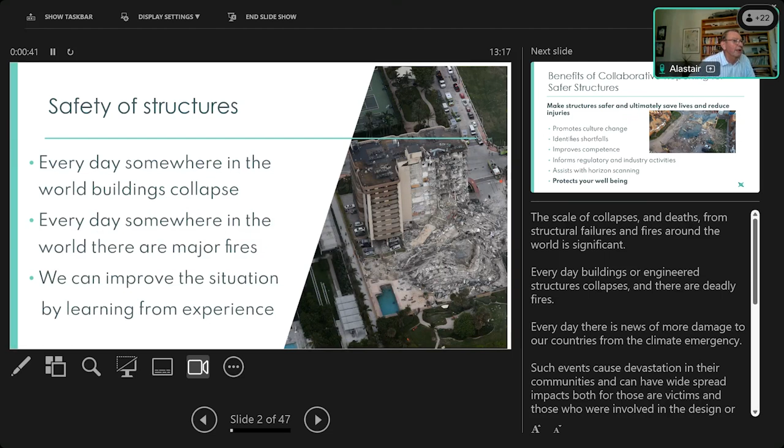CROSS stands for Collaborative Reporting for Safer Structures. It's been ongoing for a number of years, and I will go through a bit of the history, some examples. But whilst most buildings are designed and constructed and occupied perfectly safely, every day somewhere in the world there are collapses, and every day there are major fires. But we can improve the situation by learning from experience, and that's what our job is to do. Pick up information from various sources and share that with advice on how we can improve the culture, which is a very long-term thing, make structures safer and ultimately save lives. That's our big objective. But also we can identify shortfalls, such as the ones you will see from GIRI.

We can help improve competence as well. We work with regulators, and we try and do something which is called horizon scanning, which is to see what is the next big thing which might be coming along and affect our industry. But above all, we are there to protect your well-being. So anybody who's been involved with a major event will know how debilitating it can be. Indeed, can be shattering and can destroy lives and careers. If you can avoid being involved with any such event or catastrophe, then your well-being will be much improved.

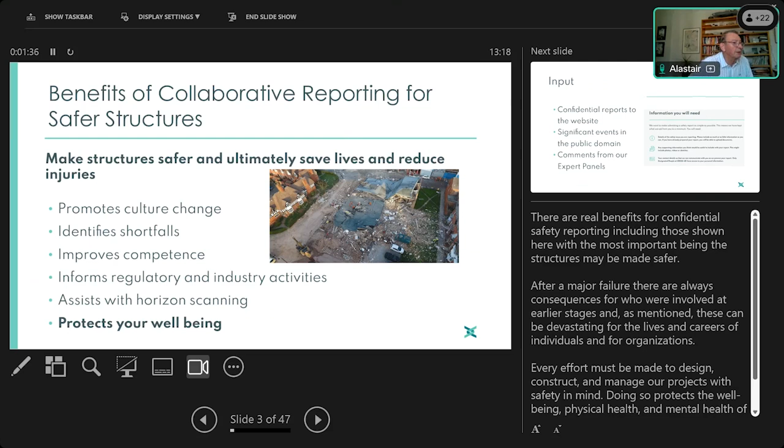So what do we have as an input to our systems? We get confidential reports, and the confidentiality is a very important aspect of what we do, because we never publish the names of reporters or details.

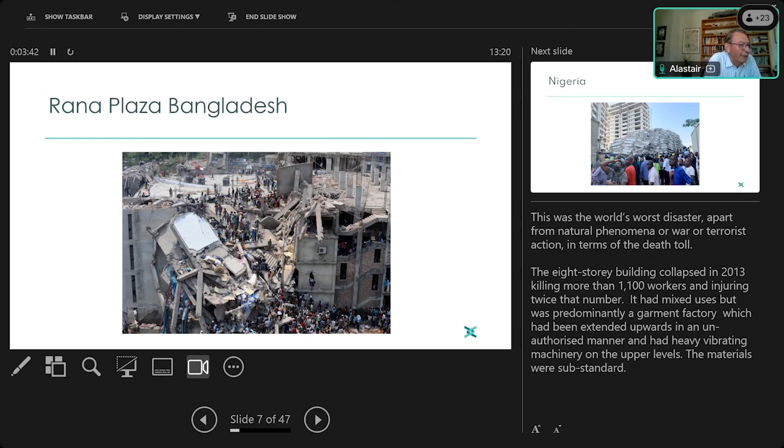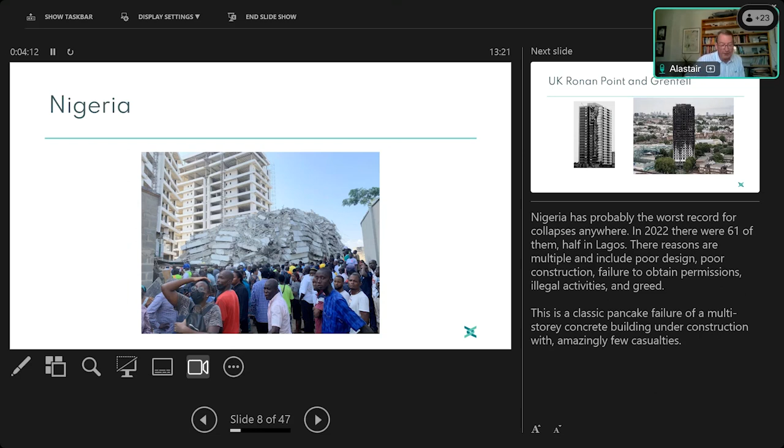Here is one in Nigeria. The pile you see in the foreground is debris from a multi-story building in what was a pancake collapse - a classic collapse where one floor comes down on top of another. The most extreme example of that was the World Trade Center collapses, but this is one in Nigeria where there are many, many collapses - Lagos is particularly bad. We don't necessarily get to know the details, but structures can be very dangerous in Nigeria.

And we've had our own share in the UK. On the left-hand side is Ronan Point, a multi-story building with a corner that collapsed as a result of a gas explosion - a relatively small gas explosion near the top - which led to all sorts of changes in building regulations and the design for increased robustness in buildings. And on the right, of course, is the sad sight of the Grenfell Tower. We'll talk more about that later, but events relating to catastrophic situations in buildings can occur in London as well as anywhere else.

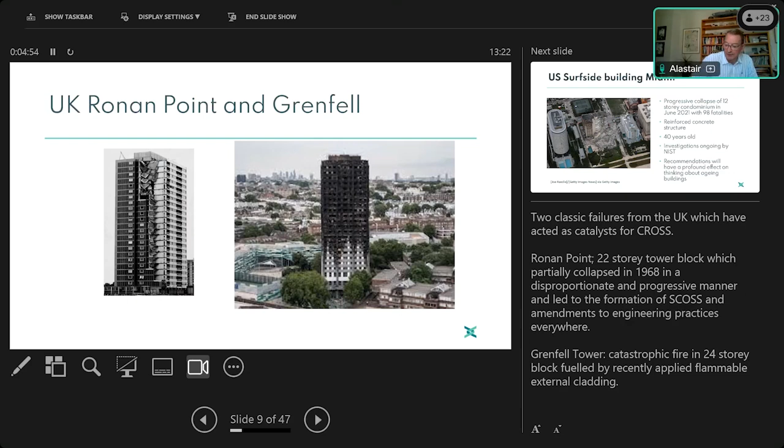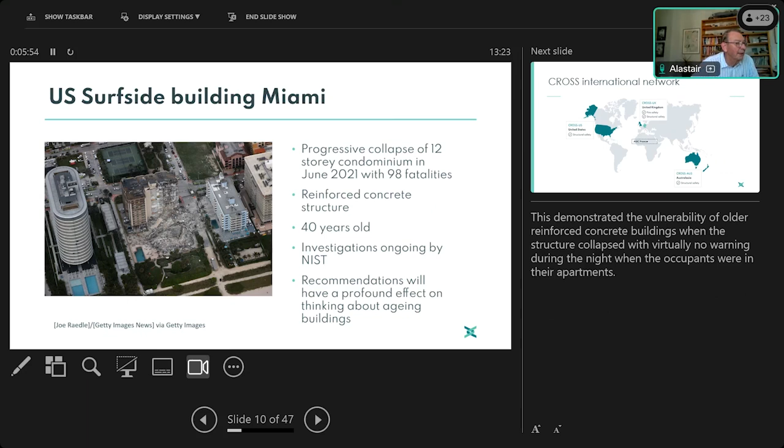And here is an example from America. You can see a pile of debris in the middle of the picture on the left, and that is the south side of a condominium block. The north side remains in place. It was 40 years old, reinforced concrete, and it collapsed with virtually no warning. It collapsed at night, so the apartments were occupied, and there were 98 fatalities. There's an investigation going on at the moment by an organisation called the National Institute of Standards and Technology, a very high level federal agency in the States. When its results come out, probably early next year, the recommendations will have profound effects on the way we all think about 40-year-old concrete buildings - how safe are they, and how do they need to be observed to make sure we don't get similar events here as well as in the States.

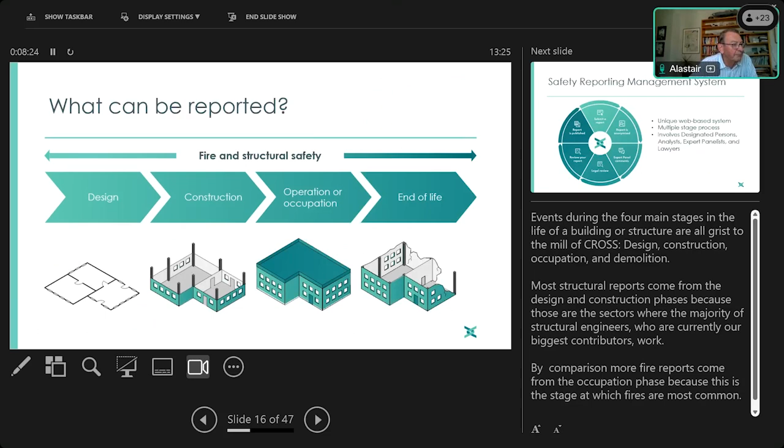And we have a very sophisticated safety reporting management system. We've got 25 steps which go from the time when somebody submits a report to the time when it gets published. These are steps involving anonymization, comments from our expert panel, legal reviews, and other matters to make sure that everything we publish is safe from the point of view of the reporter, and safe and secure from the point of view of CROSS.

Our expert panels consist of volunteers from throughout the sectors, from design, construction, academia, nuclear, civil, and the whole gamut of experts who might be expected to operate at the top levels of the construction industry. Some of them have been there for many years, and they're all dedicated to supporting the role of CROSS.

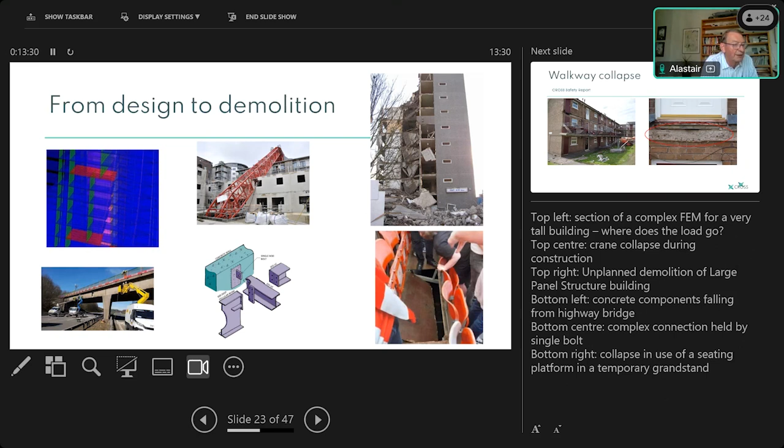That brings to mind the 4 bolts, for example, which was the failure of the Boeing aircraft recently, and the failure at the Manchester Arena from some equipment which fell down, both because of a lack of bolts. Finally, the picture on the right, a bit difficult to make out, shows someone who fell through the floor of a temporary seating stadium, tripping due to defective construction or ineffective maintenance.

So we cover all the gamut, and I'm going to give some examples, rattling through these. On the left is a block of apartments with balcony access walkways at 2 levels. The top one fell onto the bottom one, fortunately without anybody being killed. If you look at the picture on the right, outlined in red, showing the breakage, the rebar is in the bottom of that slab. So that slab had existed for years without any reinforcing in the top, where, being a cantilever, it should have been.

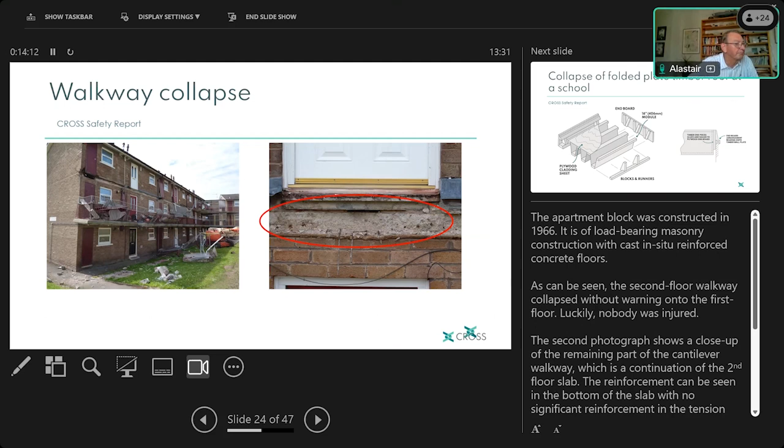We get quite a lot of reports about problems with schools. This is a rather complex roof which collapsed one night. Again, we get a lot of collapses at night, possibly due to temperature changes, but also it's luck when buildings are not occupied. This is a complex roof over an assembly hall made of bits of plywood cladding, some softwood battens, some very small nails and some glue.

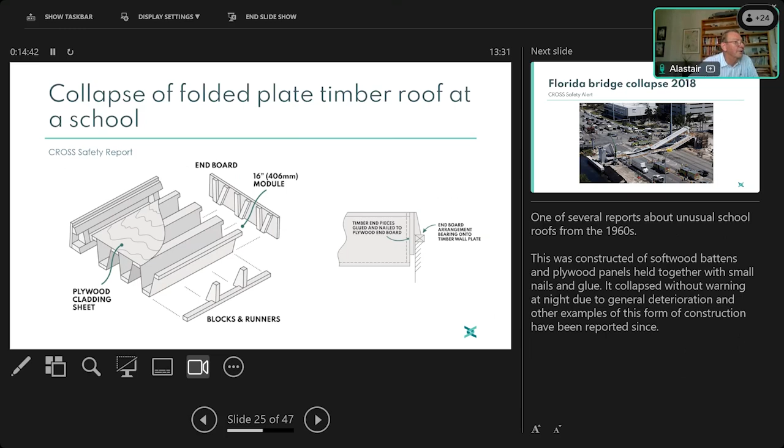It lasted about 40 years before coming down, and we've had several others since. And one from America, about which we wrote an alert. This is a bridge which was partially built, resting above a running 6-lane highway, when it came down suddenly, with unfortunately vehicles underneath it. Just a little bit of detail about this one.

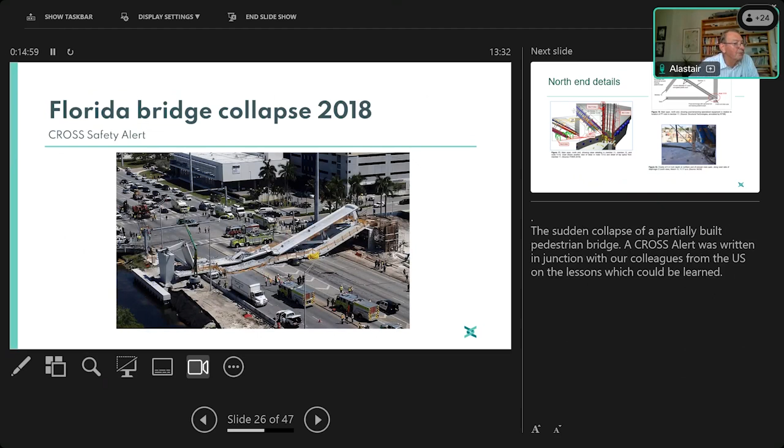You will see on the bottom left-hand corner a complex joint with vertical and horizontal members of a concrete truss. There are rebars coming in from several directions, and pre-stressing cables coming in. To complicate things, there is a drain pipe running through the middle of that connection. It's shown on the top right where there is a diagonal, and at the bottom right-hand corner.

After this had been put in place on temporary supports, large cracks developed - you could put your fingers through them. Over a period of 3 weeks, those cracks developed. They were seen by multiple professional people, including the engineers who designed it, the engineers who supervised it, and federal authorities, and they all did nothing. Then it was decided that in order to close the cracks, the pre-stressing in the diagonal would be increased, and as they did that pre-stressing, the whole thing fell apart. So, problems with design and construction, most importantly problems with people not paying attention to obvious defects and not having the moral courage to do something about it.

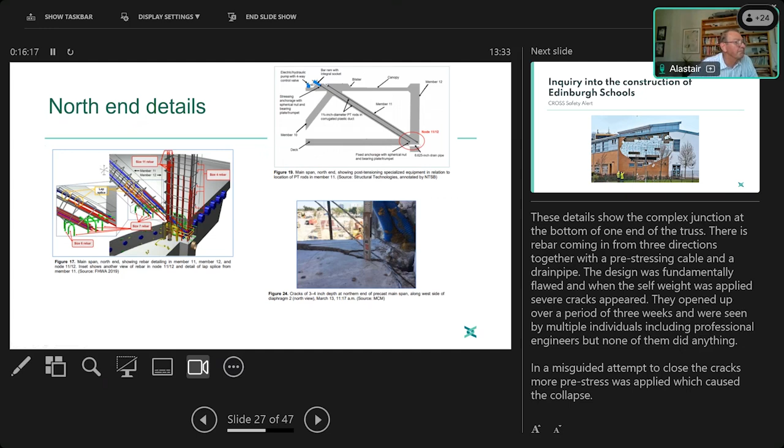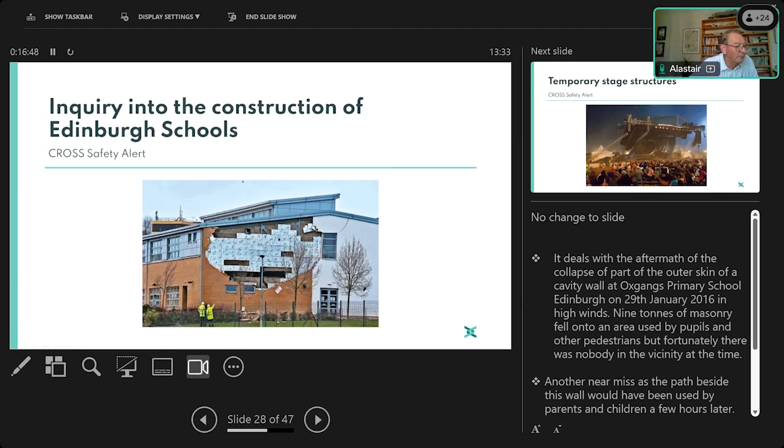Another alert we did was about construction of the Edinburgh schools a few years ago. The white blocks you can see are insulation, so they had nothing to do with it, but the big hole here was caused by 9 tons of masonry falling into a walkway, which a few hours later would have been full of children and parents on their way to this primary school. It was an endemic fault that occurred in quite a number of buildings, to do with the fixings between the two leaves of the inner and outer wall.

Here's one very dramatic photograph of a temporary stage collapsing in the States. In structural terms, it's an inverted pyramid - all the load is at the top, all the mass is at the top, and it's on very spindly legs. In a relatively slight wind, this blew over and unfortunately again killed quite a number of people underneath it.

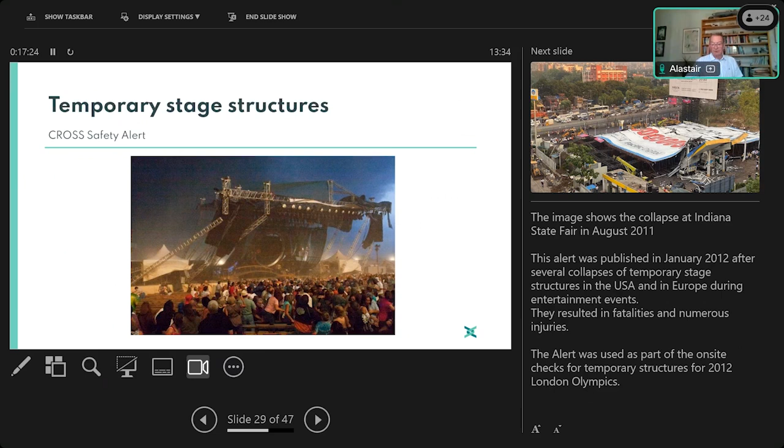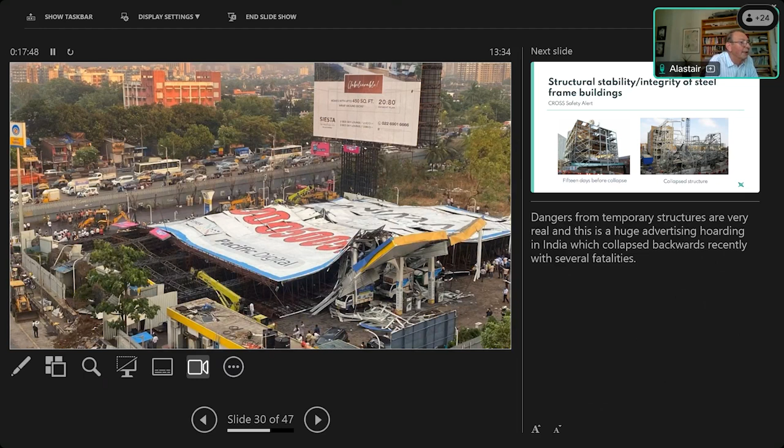We wrote an alert on that, which had been used quite consistently by industry worldwide in relation to the safety of temporary structures. Here's an example taken from the internet. If you can see that large sign lying on the ground, that is a huge hoarding in Mumbai. It should have been vertical. It collapsed, and again, multiple fatalities. So temporary structures can be a problem, particularly when there is any kind of wind related issue, particularly if they're up for any length of time.

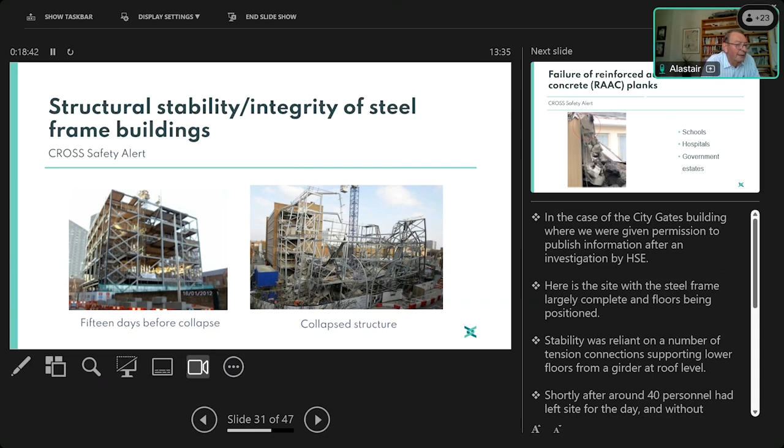Here is a case where a building in London collapsed, shown on the left-hand side 15 days before the collapse. A building apparently in good order, steel frame. The unusual thing was that the intermediate floors were supported from a story-high girder at the top because the ground floor was to be column-free, as it was to be an assembly space. Just after 40 people had left the site, shown on the right-hand side, the whole thing came down. Problem with tension fixings, but again, a matter of luck, because the 40 people who left the site had been on that building a short while beforehand. So safety in a construction site accident, or an accident involving any kind of collapse, is often a matter of luck and timing.

And then much more recently we'll come to the failure of reinforced autoclaved aerated concrete, or RAAC as it's known. We first got a report in 2019 into this, and we published an alert, and the alert then took off, and RAAC has been found in schools, hospitals, government estates. The cost now is amounting to billions. As we know, hospitals are propped, schools are closed. It's a perfect example of how CROSS works, because we got a report in, it got processed, it got published, that generated more reports, that then created interest within the institutions, interest within government, then the whole thing mushroomed. But it started, the current problems' awareness started with a single CROSS report.

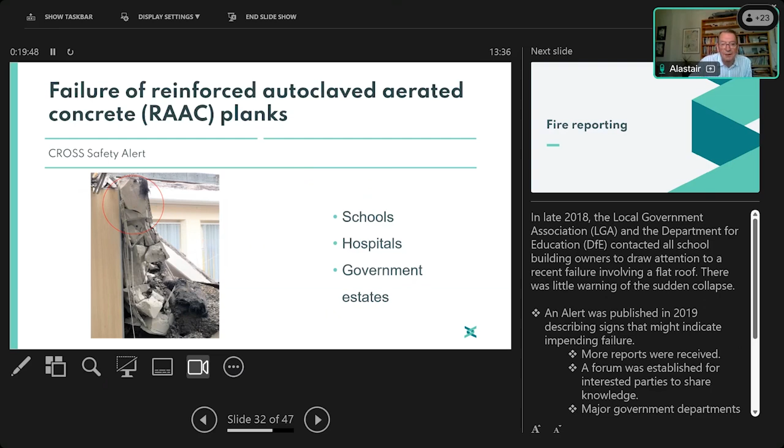So I rattled through that very quickly. There's more on the website and we can cover more of these in discussion. But I would now like to hand over to Neil, who is going to take over the role, and I'm going to stop sharing. So Neil, over to you.

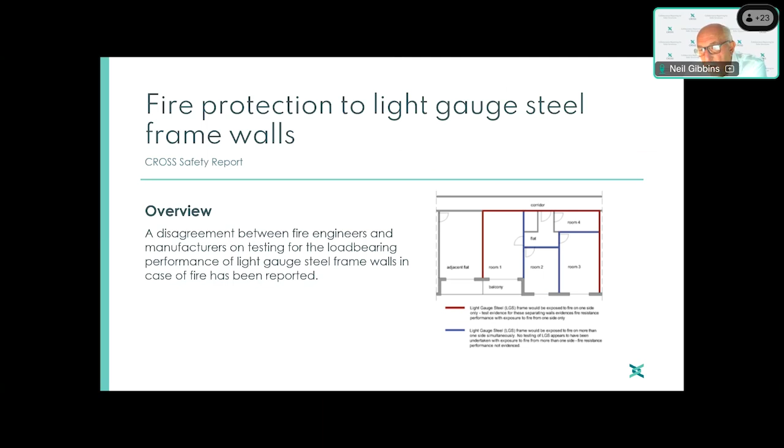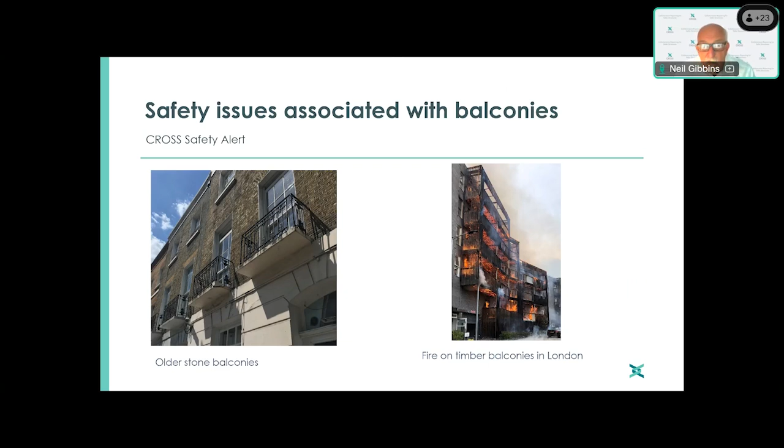Balconies, another one that crosses over between structures and fire. We've had collapses in older stone balconies. We've also had fire spread in London via timber balconies appended to the exterior of buildings. We believe people have been using balconies for barbecues, possibly firework displays, but the rate of spread over the surface and the risk to others led us to publish an alert.

Multi-storey car parks. Before CROSS was involved with the fire world, Alastair looked at the fire in Liverpool following the arena car park fire. If you look at the picture on the right hand side, you see the degree of devastation to the vehicles, but it caused a great deal of thinking about how we design and build multi-storey car parks.

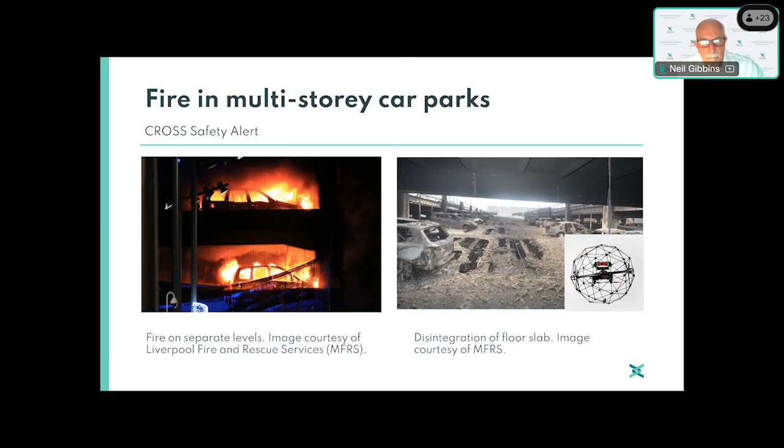The recommendations from that 2018 alert pointed the finger at the approved document requiring only 15 minutes fire resistance to the structure, looking at whether that would provide sufficient robustness. If a major fire occurred, will it lead to collapse? Should we be considering penetrations through the floors that might be vulnerable to allow vertical spread of fire? And there are other areas where pools of burning fuel could form.

Was that listened to? Was that picked up by industry? We don't believe so. The designers of the Luton Airport car park that suffered a terrible fire earlier this year - late last year now - the steel frame just about managed to withstand complete devastation, 1,400 cars destroyed, but as importantly, a major infrastructure hub was brought to a halt for a good period of time. We were stressing in our reports that all these matters should be considered at the design stage.

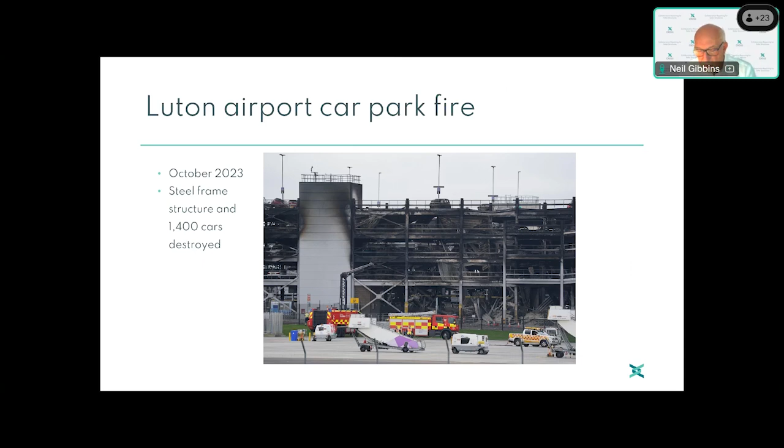Lithium-ion batteries - we had a terrible report through from our international connections in the last few days about a horrendous fire in Korea. We've been receiving reports from the Fire and Rescue Service and others about the nature of risks caused by malfunctioning lithium-ion batteries, often end of life, often de-recharging. We're advertising the fact that we've got these problems and we're looking for solutions and to share good practice.

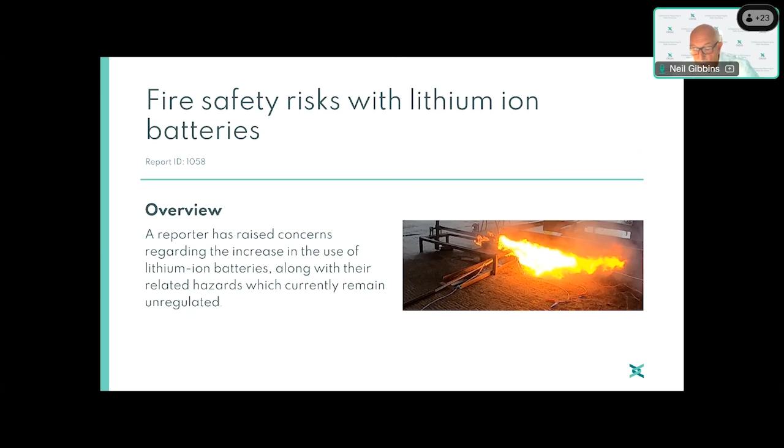It's not all massive, it's not all about major structural issues and major fires. We have received a number of reports about detailing, about the small things that possibly go through most buildings throughout their life without causing any problem.

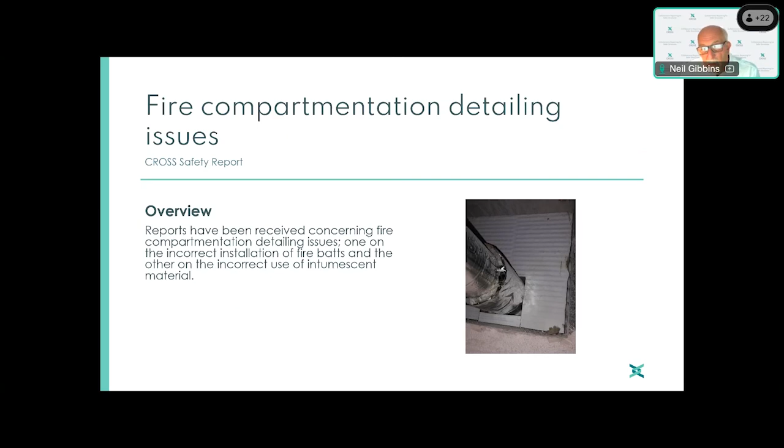But just at the moment you need to make sure a fire doesn't spread from one compartment to another, you expect the intumescent material to react appropriately with the fire, but in this instance we've got some incompatible items used together. That kind of detailing is often only picked up - well, not generally picked up by building control, given the degree of interrogation of the structure that would be needed to identify it - but often picked up by the fire service when they question why this fire crossed that barrier.

We think everyone should stay up to date reading CROSS reports. We very much encourage people to report information to us, and we've sifted through and identified key lessons that can be drawn from CROSS reports historically, be they structures or fire. Similar issues will recur. We don't seem to learn, but we should.

I remember this from the GIRI presentation that Rupert mentioned at the start: inadequate communications and a lack of responsibility, lack of competency at all levels. We've talked often about the cost of competency, but I like to retort with the cost of incompetency.

Deterioration and degradation in older structures coupled with a lack of maintenance cuts across fire. We've got current reports about automatic opening vents that people didn't realise were actually automatic opening vents and have been painted over, replaced, or removed because the original plans and design concept had not been passed forward. Changes in architectural trends - we talked about CLT, light gauge steel, certainly timber frame buildings - and we've had a significant number of fires involving unexpected spread across such buildings.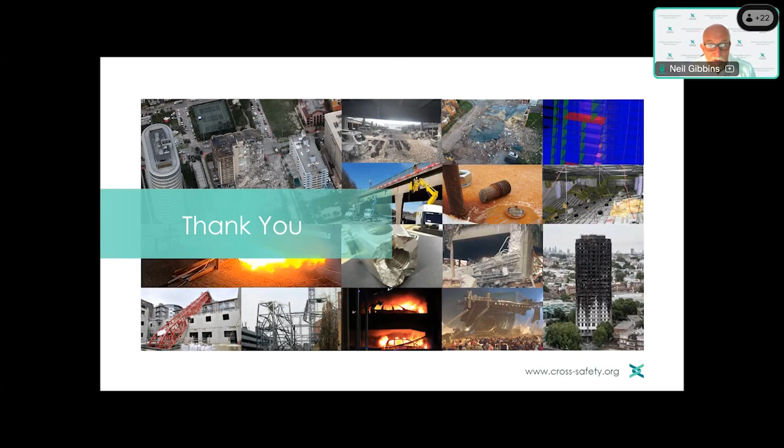A collection of photos of failures, common threads, could have been prevented. Someone could have done something, someone could have said something. But let's hope we move forward and learn. We'll have to keep pressing to that. You're the great and good listening today, and it's fabulous to have this opportunity to speak to you. Thank you, and back to Rupert, I believe.